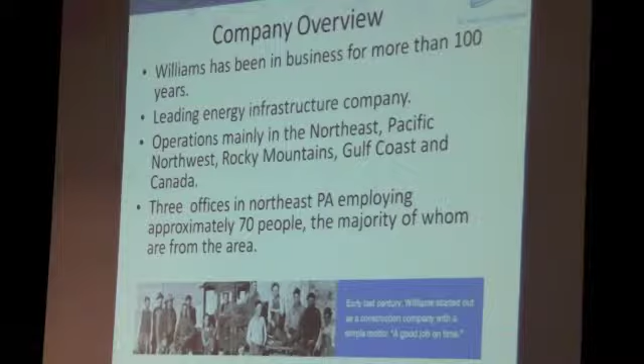I'm pleased to say that I was thrilled to join Williams after they acquired Laser in mid-February. I've had a long history with Williams. I know they're an extremely reputable company, and they do a great job in building and operating infrastructure.

This next slide is essentially a simple overview of the natural gas value chain. And that value chain is different depending on the type of gas that you handle. In northeastern Pennsylvania, we're lucky that it is very simple. As you see, you basically have your wellhead, which is considered your upstream or your exploration and production. That gas moves into a gathering system, which is what we operate. The gathering system is responsible for transporting and making that gas ready for delivery into a downstream pipeline or interstate pipeline.

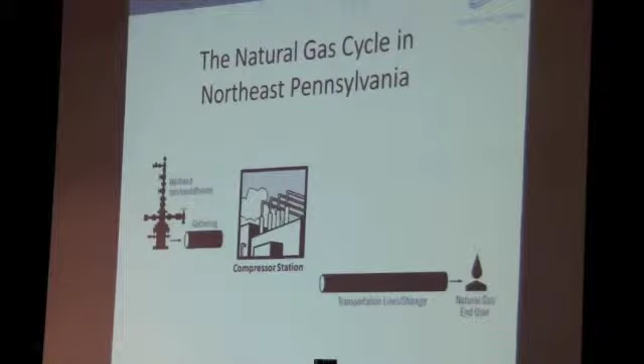Some of the things that we do include dehydration of the gas, which is essentially just taking out water or water vapor, and compressing the gas so that it can meet the pressure requirements of the downstream pipelines. Then as you move into downstream, you have the natural gas end users.

You know, we all know that the country is undergoing a total transformation in energy. We have an opportunity in front of us to use one of the cleanest burning fossil fuels there is in natural gas. Even though folks in Susquehanna County today maybe can't use natural gas in their home for heating, like a lot of the country does, you're benefiting from today's low-price natural gas environment through the power that you use at your house.

30% of all electric generation comes from natural gas. You can see the rest of the numbers, but residential and commercial, a lot of that is space heating. Industrial applications use natural gas for a feedstock. So the price environment that we're in today benefits us all. You may not have it heating your house, but it is going to work its way through to you in other forms.

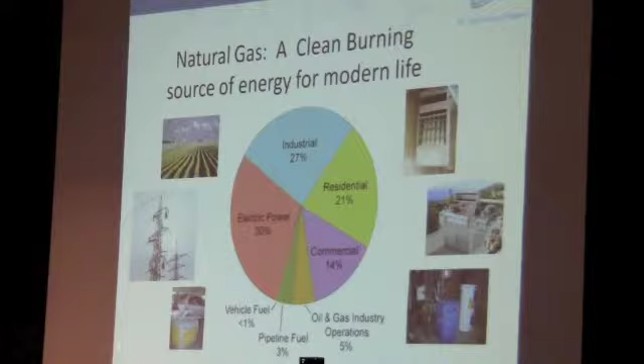Why do we need compressor stations? That's a good question. It's a question that we're often asked. The primary purpose of the compressor station is to make sure that the gas, as it is gathered in the field, can meet the pressure required to flow into the downstream pipeline. Today, we're currently delivering our gas into the Millennium Pipeline, which is in Broome County, New York. Millennium Pipeline is running anywhere between 1,000 and 1,100 pounds.

What you will typically see in the field, even though you'll hear anecdotally how high the wellhead pressure is, producers don't like to and can't operate at those high wellhead pressures for very long. So we may be gathering gas at 400 or 500 pounds, but we need to get it up to 1,100 pounds to actually deliver it into those pipelines.

And I guess hydraulically, an example that I like to tell people is that if you picture Interstate 81 and traffic going down Interstate 81 at 75 miles an hour, if you are natural gas and you're on the on-ramp and you want to get into that pipeline, you've got to be going 75 miles an hour or you can't get into that flow of traffic. And that's essentially what happens from a hydraulic standpoint with natural gas flowing at lower pressure. We need to compress it and we need to be able to deliver it in at the downstream pipeline pressures.

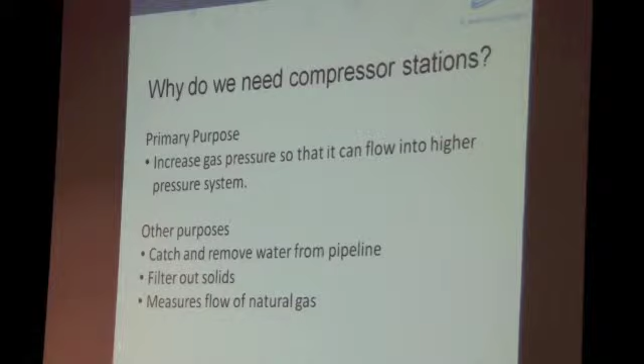A couple other things that we do at the station, as I mentioned before, we'll remove any water, whether it's free liquids or water vapor. We'll filter out any type of solid or particulate matter, whether it's sand or dust or grease or grime. And we'll also measure the natural gas through the station. This map is a map of the legacy Laser pipeline. It's now called the Windsor line.

What you can see is there's 10 miles of pipeline on the northern end. That's in New York. That's where our delivery into the Millennium Pipeline is. There's about 23 miles of pipeline through Susquehanna County, and we've got the 4 compressor stations that we have permit applications in today, shown in green: our Northeast Station, Snake Creek, Cane Road, and Lane Road.

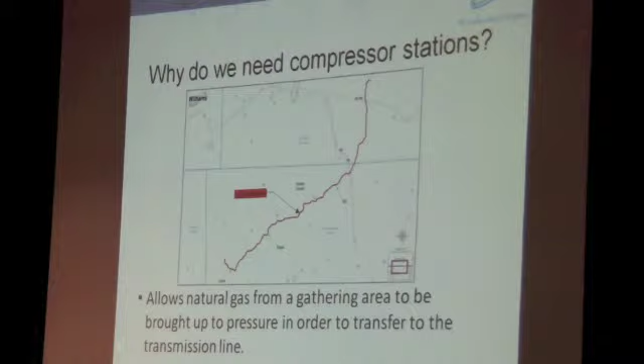And folks will often ask, well, how do you locate these stations and why are they where they are proposed? Essentially, each one of these stations is going to serve as a central delivery point for an amount of gas that is being gathered behind it that the producers are drilling. So each one of these areas is going to have a lot of acreage dedicated to it that is being moved into these central delivery points so that we can compress it and actually deliver it into the pipeline to move into New York.

Relevant components to the permit application, a couple of the emission sources. Compressor engines. Compressor engines are the devices that drive the compressors that actually compress the gas. In our case, these are typically Caterpillar 3600 or 3500 series compressors. Dehydration units. The dehydration units are the apparatus that will actually remove water vapor from the gas. And a produced water tank, that's the tank that once that water is taken out of the gas through various methods, that's where the water is delivered until it is trucked off-site to be processed.

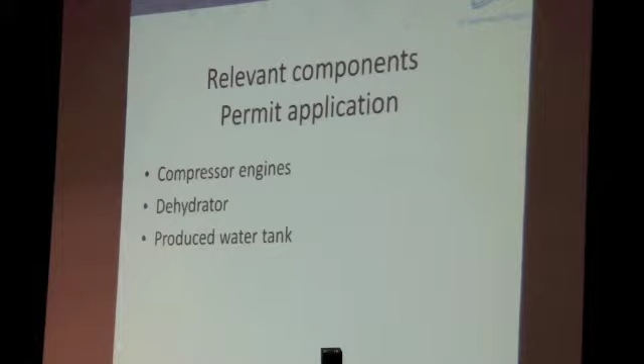Some of the engine and site controls that we have on our stations: the compression and the related equipment, so the dehyds and the tanks, they're all monitored with very elaborate and sophisticated process logic controls, or PLC systems, that monitor operations. They help us ensure that the systems are operating at or below the permitted emission levels. There's literally hundreds of operating parameters that are monitored simultaneously 24/7. So these stations are going to be physically visited several times a day by our operating technicians, but they're also going to be watched 24/7. Every second somebody's going to have eyes on them.

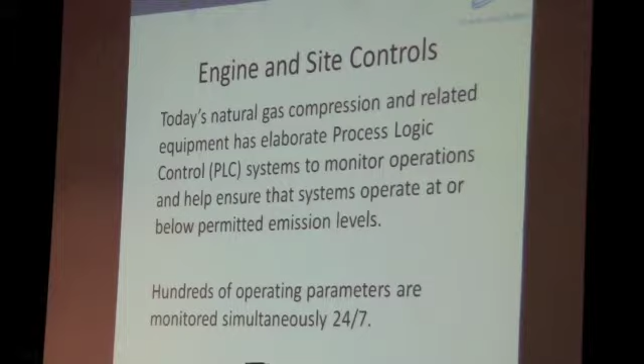And some of the parameters that we look at are temperatures, pressures, differential pressures, things like that that will indicate to us how the equipment is operating, allow us to make decisions as to whether or not we need to perform maintenance or do investigations, just to make sure that it is functioning as intended, which will help us meet and exceed all of our emission levels.

Best available technology for the engines. You've got a couple of emissions that you're concerned about. First one is nitrogen oxide, or NOx. One of the ways that you control NOx is through the use of an air-fuel ratio controller. What that controller allows you to do is run a lean fuel mixture. By running a lean fuel mixture, you're able to limit the amount of NOx that is produced from the engine.

And the second thing that we use is called an oxidation catalyst. The oxidation catalyst on the engine, very similar to a catalytic converter on your car, is going to control your carbon monoxide, any volatile organic compounds, and formaldehyde. When you combust fuel, you're going to have these things, whether it's your car or your tractor, these are the results. So best available technology allows us to control these.

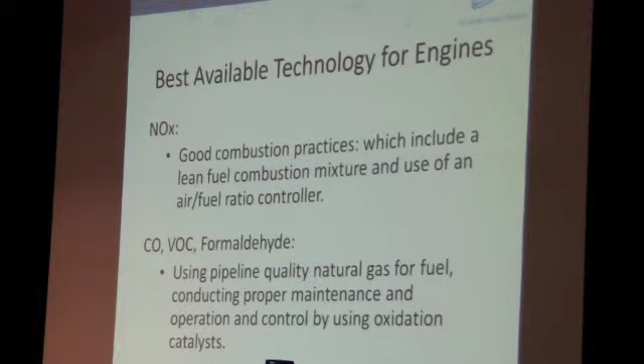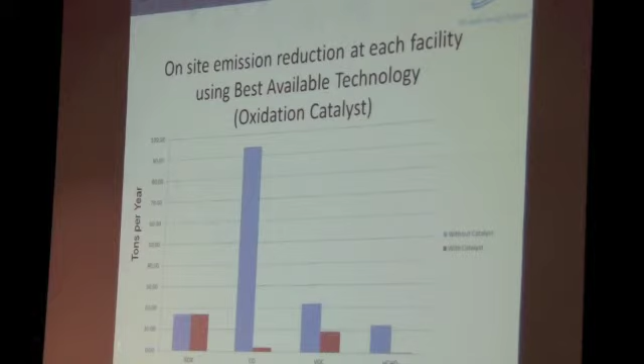Another question that we get quite a bit is, well, you want to put a compressor station in our area, what is it comparable to from an emission standpoint? It's sometimes difficult because it's not always apples to apples. You can't just say it's this on NOx and this on VOCs. But what we try to do is get things that are generally the same.